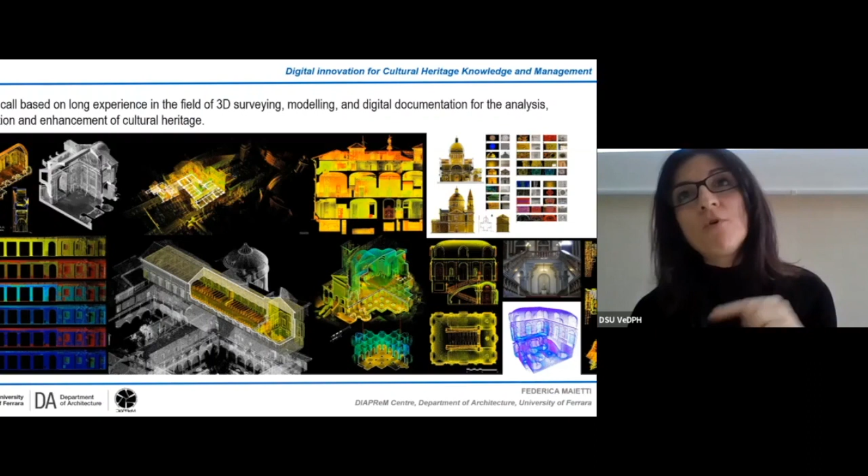So 2015 was the perfect moment to apply to the call, also for us, also to understand, yes, we are at this point of the research, we have to go a step beyond the state of the art, and so we decided to do this project.

Here you can see the partnership with 14 partners from 10 European countries. Just to say that it was really an interdisciplinary project, because we needed to work together with different kinds of expertise. So experts from SMEs, experts from the ICT world, in addition to university and colleagues from the academic world, but also research centers, very focused on this kind of innovation of data.

Here you can see very shortly the picture of the state of the art of 2015, capturing a lot of tools, a lot of devices, but a lot of time-consuming processing to manage.

Thank you. And in the field of 3D processing, the advancement proposed to the state of the art was related to the missing of a BIM standard for cultural heritage. I will discuss this great issue of BIM standard for cultural heritage later on, but it was an issue that we faced during the project advancement. And model sharing is the third topic that we managed in order to understand how to create effective management.

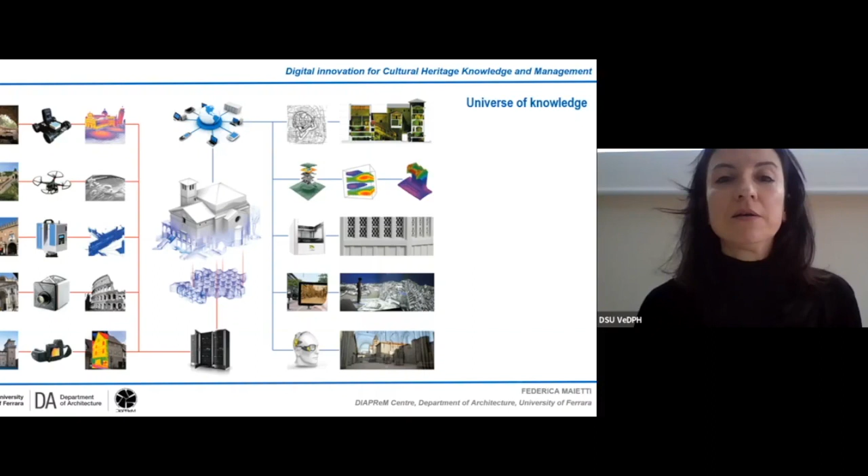This universe of knowledge maybe can help you in understanding what I mean by mentioning complexity, because architecture is a sort of container of different layers of history, different layers of knowledge, different layers of tangible and intangible meanings that we have to put together in a single environment in an easy way to reach this kind of data.

So the process started from the main needs, assessing, understanding, and analyzing the European identity and diversity in order to effectively use all these kinds of technologies, creating new meanings by using semantic information.

Semantic and metadata were something that guided the project from an ICT point of view, because we needed to understand how to add data about data, information about captured data, in order to create new levels of knowledge.

Very shortly, the first objective was related to the inclusiveness and understanding of cultural heritage, facilitating collaboration among different disciplines. The second one was related to cost-effective procedures and enhancement for on-site 3D survey and reconstruction of cultural heritage.

And the third one was related to the development of an open standard semantic web platform for accessing, processing, and sharing interoperable data. The first action was really essential.

It was the basis, the knowledge basis to create the following steps. So the idea of putting together different expertise and users was central in order to try to catch the right direction for the project.

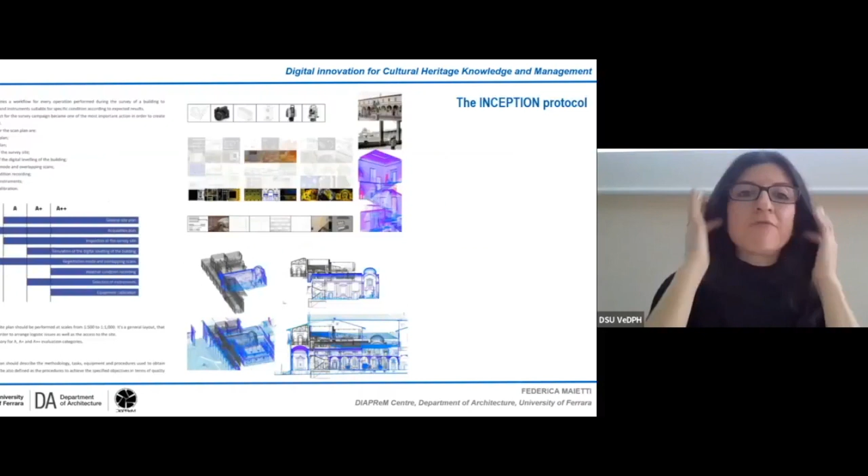The process was divided into specific actions, starting from user requirements, 3D data acquisition, new approaches, BIM semantic modeling, the deployment in order to create also a set for users applications, and of course demonstration cases and the platform. Just two words on the inception protocol.

That was one of the main project outcomes, because the idea of creating a specific workflow, considering that each heritage is unique, and that we are surveying cultural heritage, even if you have the best technology, the best tool, the most performing machine working on the 3D scanning, you have to be really aware of what you are doing, and you have to consider the uniqueness of this cultural heritage.

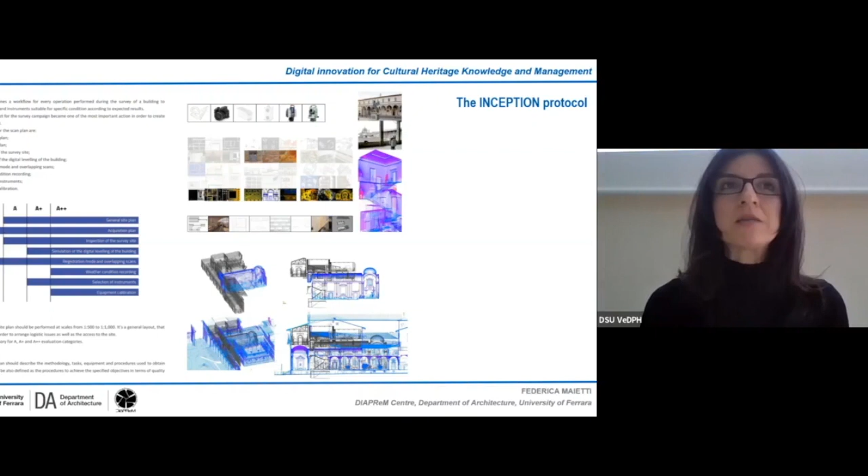So you have to be able to use the potential of the technology at its best, bearing in mind that this cultural artifact needs to be explored according to different layers of knowledge. So the idea of having a protocol with specific steps working toward the best possible procedure of 3D survey was the first step.

If you have a 3D survey that's really focused on the need that you have to reach, your work starts in the best possible way, because the idea of creating specific digitization according to the aim of the project is something that in the scientific world of survey, even direct survey, survey by contact, you have to start with the aim of your project.

So the fact that 3D survey is a quantitative survey, because you can put the tool on the scan station and start the survey, you can have a lot of coordinates, but you have to know what to do with this kind of data.

The holistic approach to digital documentation started from these concepts, going a step forward in the process of 3D scanning, up to this holistic approach, considering the idea of putting together different data, also from different sources.

Here you can see just some examples of what we tested during the Inception project. Of course we tested some demonstration cases specifically selected in order to have different contexts, different kinds of complexity to be managed within the project.

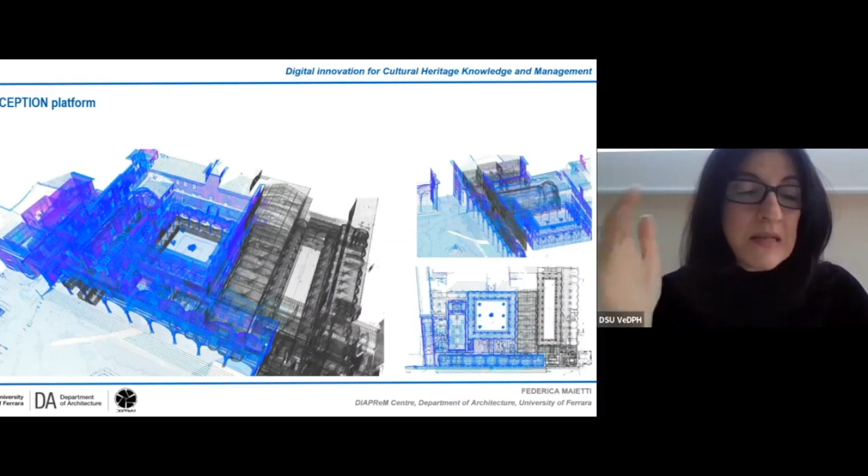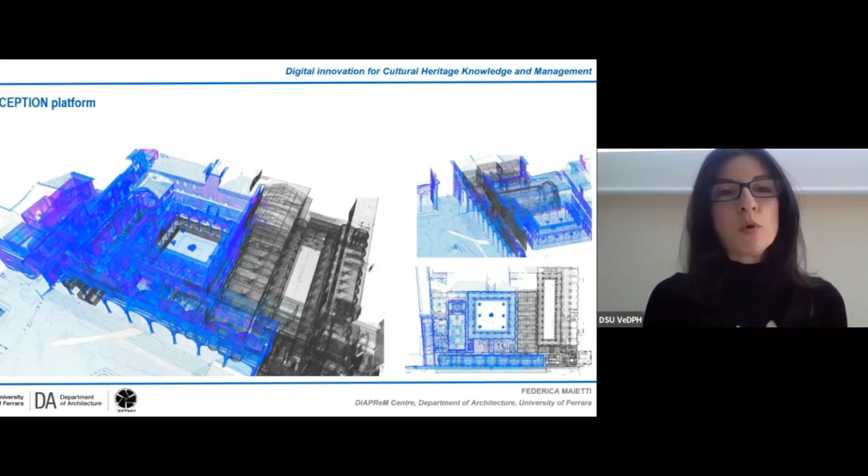Another example we tested is the Istituto degli Innocenti in Florence, that we scanned in 3D with laser scanning. Here you can see the point cloud. I think this building by Brunelleschi is able to explain what complexity is in cultural heritage when working with this kind of data.

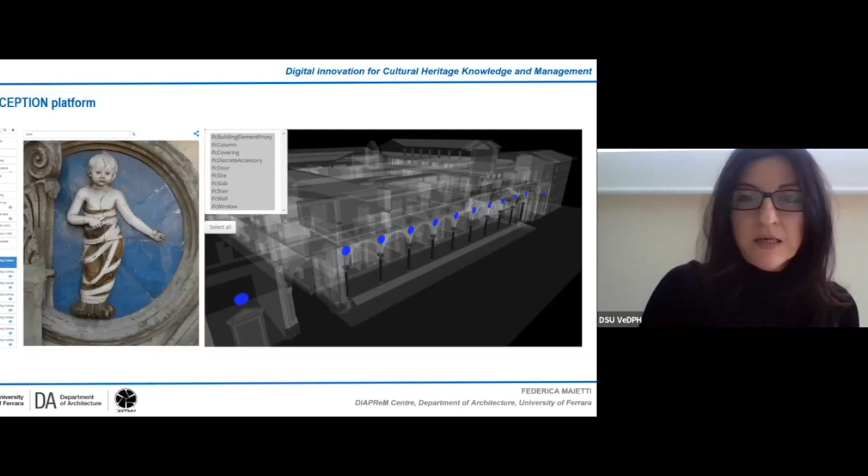Once again, in the platform environment, you can manage the IFC model, the BIM model, selecting a specific geometric entity. In this case, you can see the Tondi by Della Robbia, and you can check for additional information directly connected to the geometry, in this case pictures, but of course you can add videos, text, iconographic pictures, and other contents.

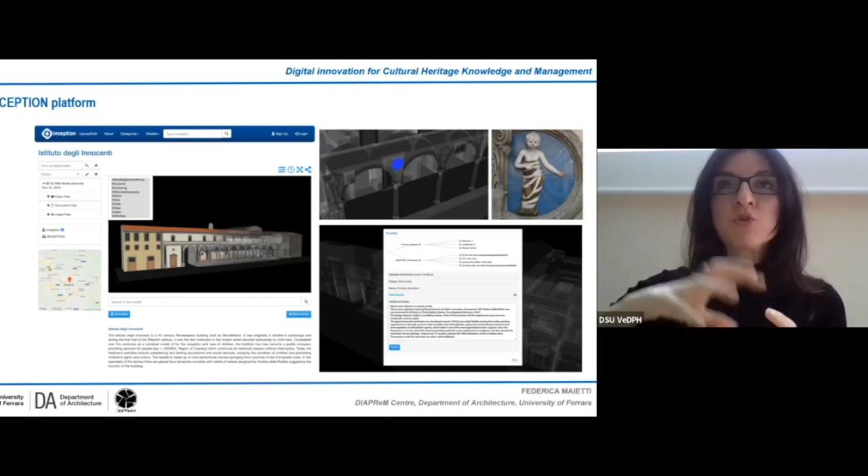The architecture behind this platform is the one I explained shortly before - the idea of creating this semantic path, putting together what's possible to exploit from the parametric geometries, searching the web for what it's possible to add using web sources. This was really challenging in this project development. Here you can see in the BIM modeling interface how it's possible to add specific items and features to the geometric object directly when the 3D modeling in the parametric environment is managed.

Here you can see one of the most recent case studies we performed together with the Institute for Catalog and Documentation of Cultural Heritage. In this case, you can see one of the visualization opportunities the platform offers - the IFC model on the left, so geometries, the model in the parametric environment, but you can also see the visualization of the texture of the model, because one of the main topics in managing cultural heritage is to have different kinds of visualization.

Sometimes you need the 3D point clouds because you need geometries. Sometimes you need the IFC model because you need geometries in a parametric entity, but texture, color, pictures and all the surface features are something we have to consider, analyze, and document very carefully.

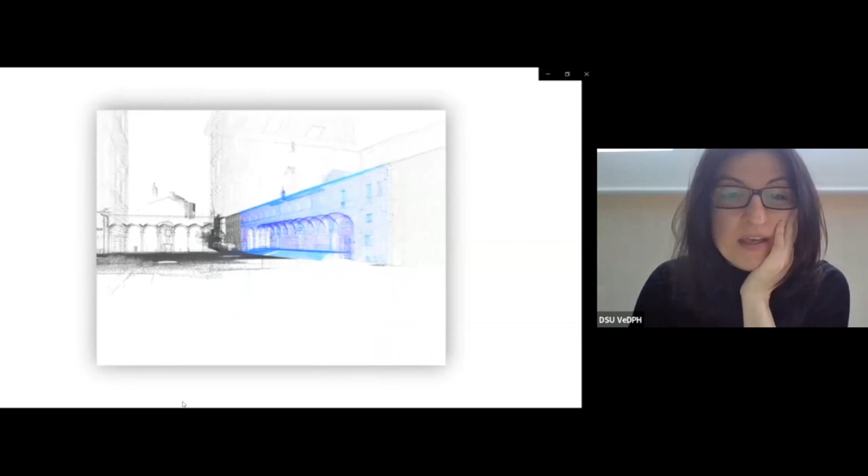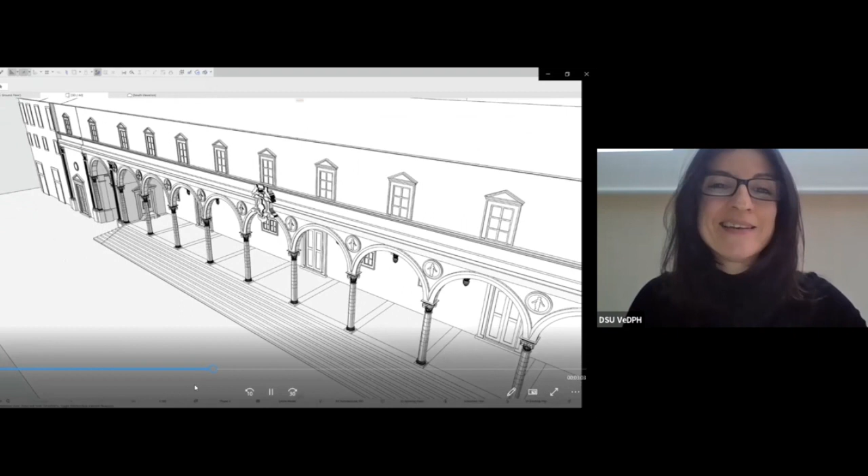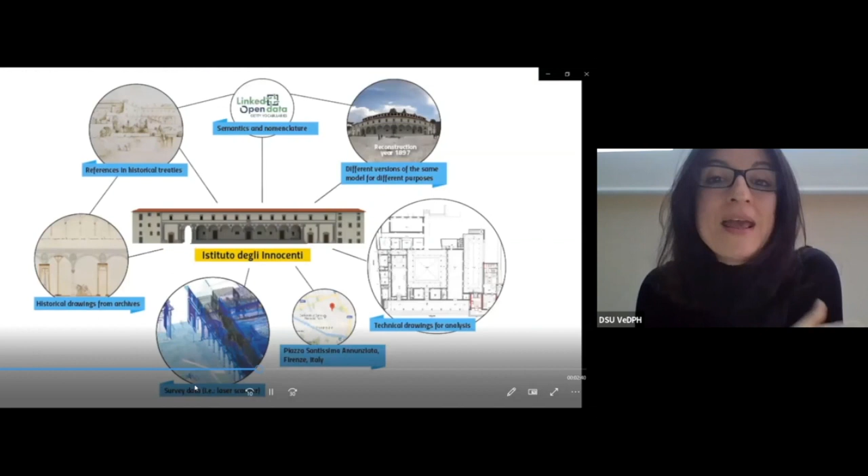Here we have the example of the digitization of the Institute of Innocenti in Florence. This is the part related to the work of INCEPTION that combines the point clouds up to the creation of this BIM, H-BIM in this case, model. Here you can see the test model realized, and how it's possible in the parametric environment to add knowledge and information, creating specific items or tags connected to the geometries, with a lot of information and data.

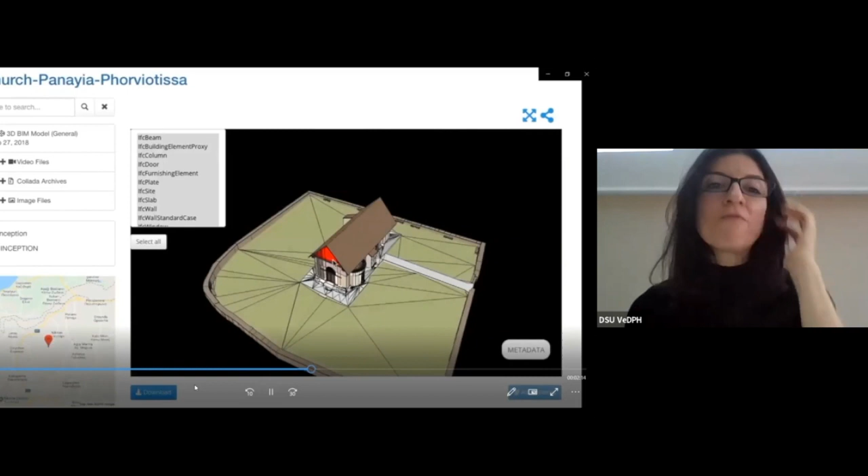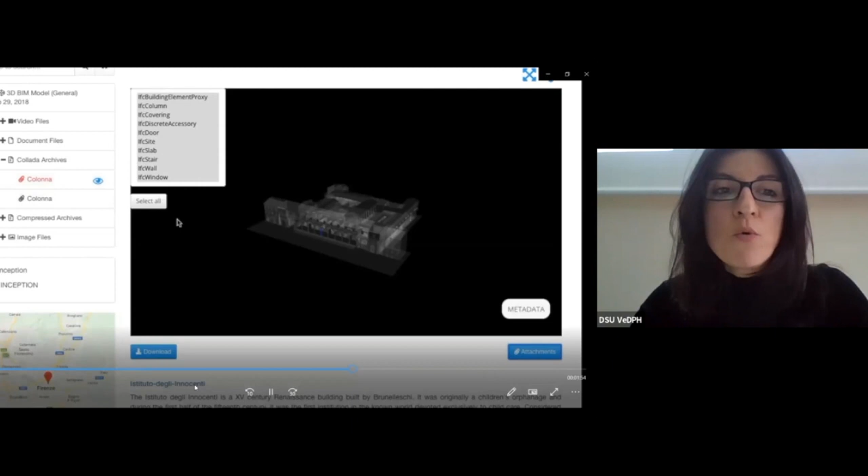In the schema, text, pictures, videos—all sources that can be aggregated—are considered. Here you can see the interface of the platform, where you can select buildings from a geographical search, or starting from the menu of different building typologies, and navigate uploaded models on the platform. Here we are in Cyprus, and the paintings shown before can be explored in a 3D environment. And here you can see the transparent visualization of the BIM model of the Innocenti, along with the IT part of the semantic approach.

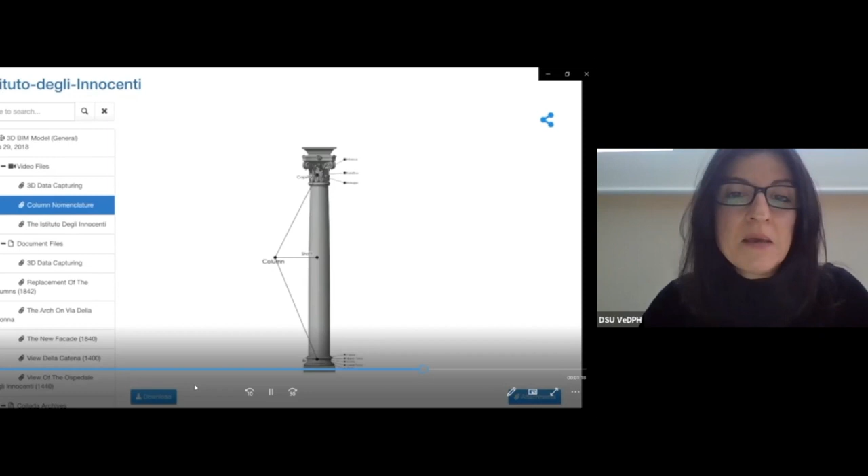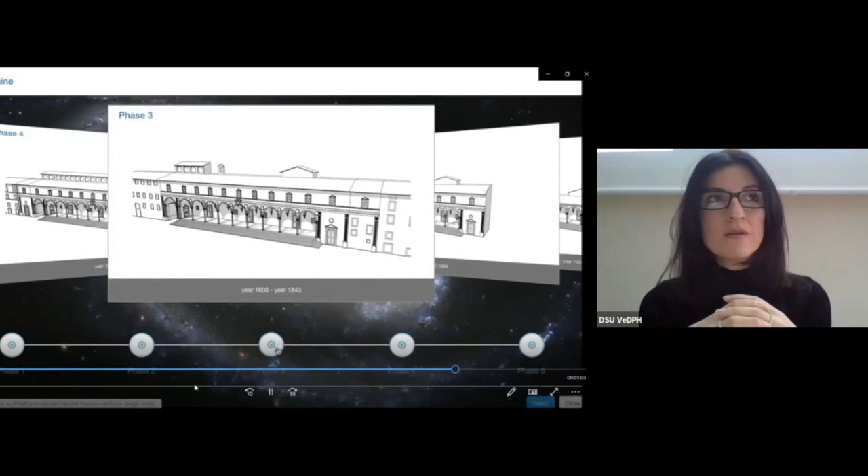In this case, the aggregated knowledge is the Getty Thesaurus of Art and Architecture, used to share content about architectural elements—in this case the column or the tondo by Della Robbia. Videos can also be connected to create additional knowledge and additional ways to explore content. Of course, the great opportunity is that all these contents are connected to geometry. When managing cultural heritage and survey, you have to manage the challenge of accuracy in the survey, handling geometries in a very precise way.

Putting together controlled geometries and additional data is very great, because you can really exploit the best from the 3D digitization that today is possible with these technologies, but you can also merge additional levels of knowledge from other domains, creating the opportunity for interdisciplinary work.

Interdisciplinary is a very used word, but it's not so easy to create great and effective opportunities for an interdisciplinary approach. I think giving the opportunity to a non-expert in IT or architecture to have an environment where historical sources or other items are put together is at the basis of this new concept of interoperability and knowledge sharing, which is the mission not only of the INCEPTION spin-off and the 4CH project, but also, in my opinion, of...

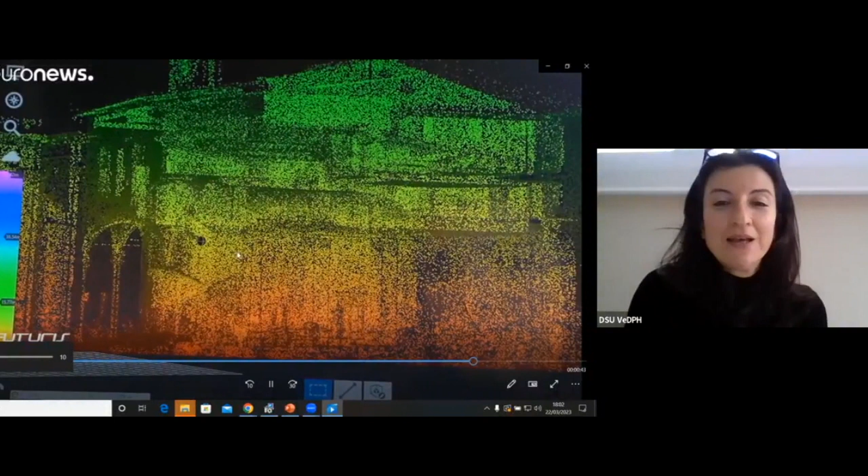Here we are working with the technology. So it was a really great experience to perform all this INCEPTION technology project, and it's of course a pleasure to go on today working on this.

I hope it was clear enough. This is a very big universe of knowledge and technologies. Maybe it's not so easy to understand in some technical parts, because in architecture we work with big issues of geometries, coordinates and data related to survey and representation, and on the other side the idea of creating added value by putting together the work of other experts working on historical research, documentation and so on. It was a pleasure to share all this content with you, and thank you very much for your attention.

Thank you, Federica.

It was our pleasure to listen to you and to learn a lot. I learned really a lot myself, especially related to the follow-up of the INCEPTION project that I was lucky to see in its birth at the beginning in Ferrara.